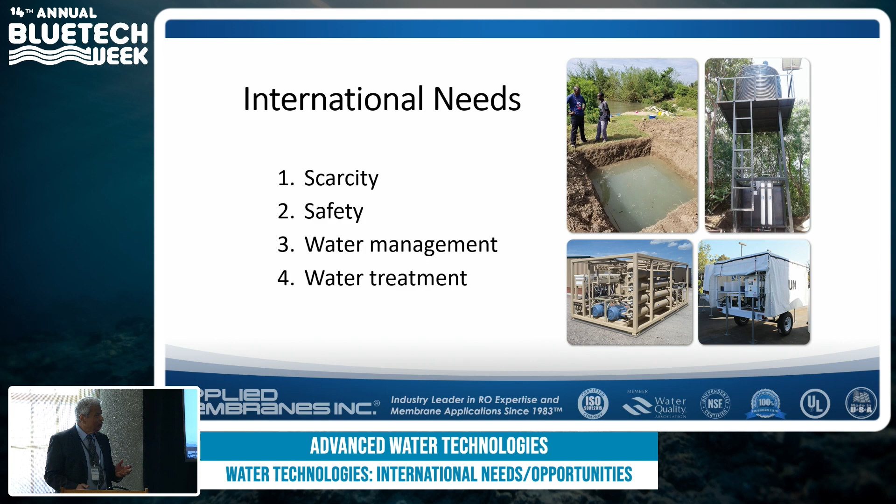So I was told that the topic was international needs and opportunities, and the time to spend on all of this is 12 minutes, so that's kind of a challenge in itself. So I will start with international needs. There is lack of water, scarcity of water, safety of water, water management, water treatment. These are the needs.

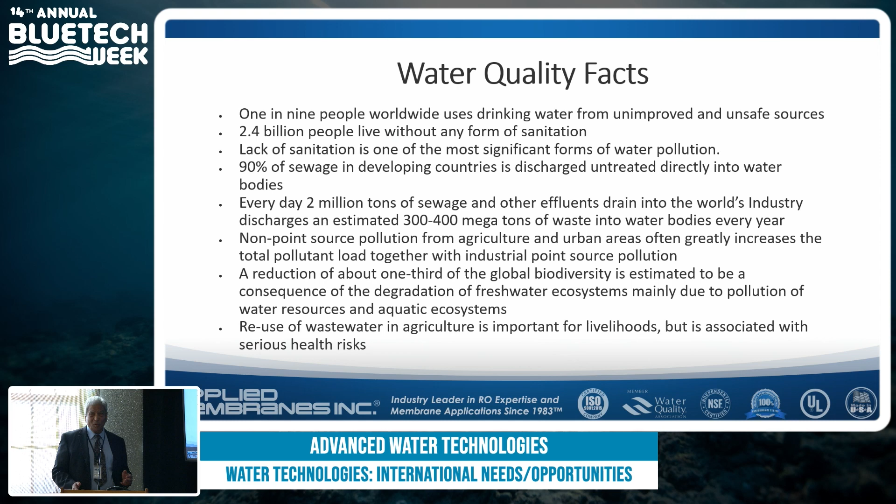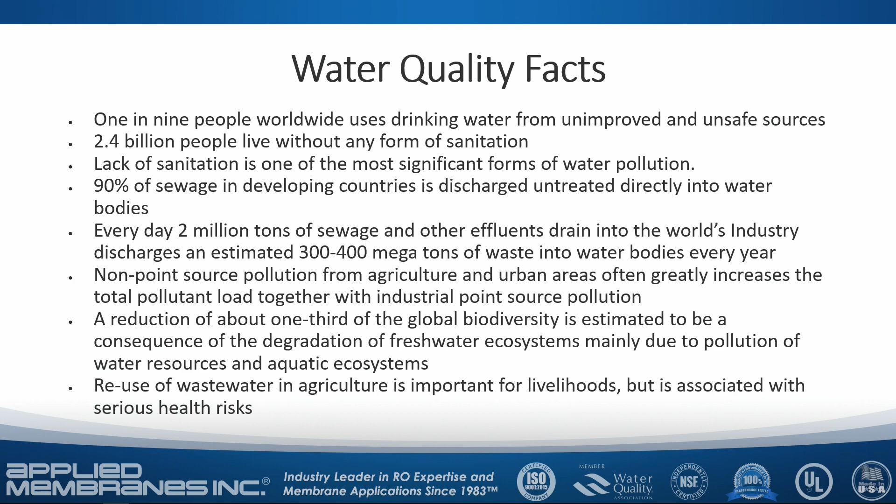Here are the facts, and all over the world, the water needs are such that they're getting more and more necessary to be taken care of in time so that we don't run out of water. So there are problems with drinking water, sanitation, the treatment of effluents, and basically all kinds of other issues with water treatment.

So what do we do for water scarcity? There are all kinds of things to be done. For example, water efficiency and how we use it, utility operations, monitoring and treatment. Some of this we heard in the panels before. Remote sensing of water, water quality control, water audit and efficiency improvement, rainwater harvesting, drinking water treatment, rivers and lakes protection, desalination, wastewater recycling, reuse.

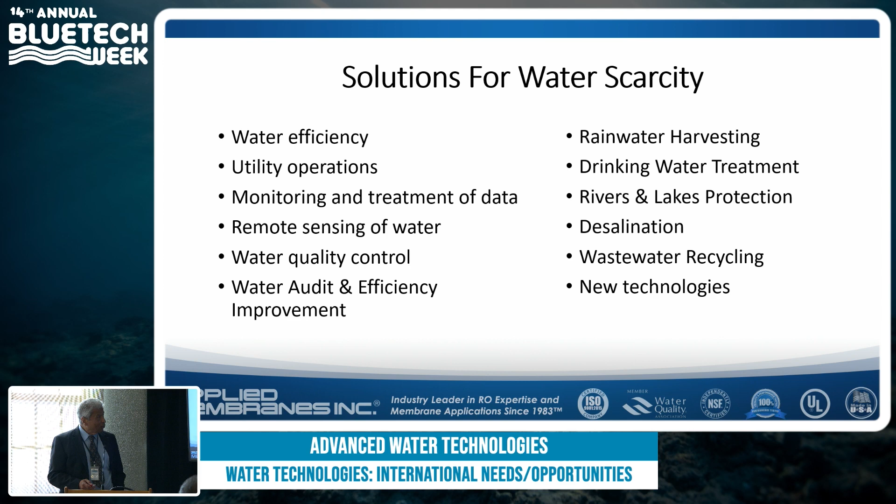Now, water by itself is not the only thing that we need to worry about. Water and energy and food - they're all three related. And what we are looking at is how do we create more usable water? It's one thing to have all the conservation, all the other things we can do to save water, and also efficiency in production of crops, in food production. All those things are necessary to save water, but that's still not going to be enough water.

Because the projection is that by year 2030, more than 160% of the total available water volume will be needed. And this means that just conserving and efficient use of water is not going to do it. We must create more new usable water. And how do we create more new usable water? There are basically only two ways to do this: desalinate or reuse the wastewater.

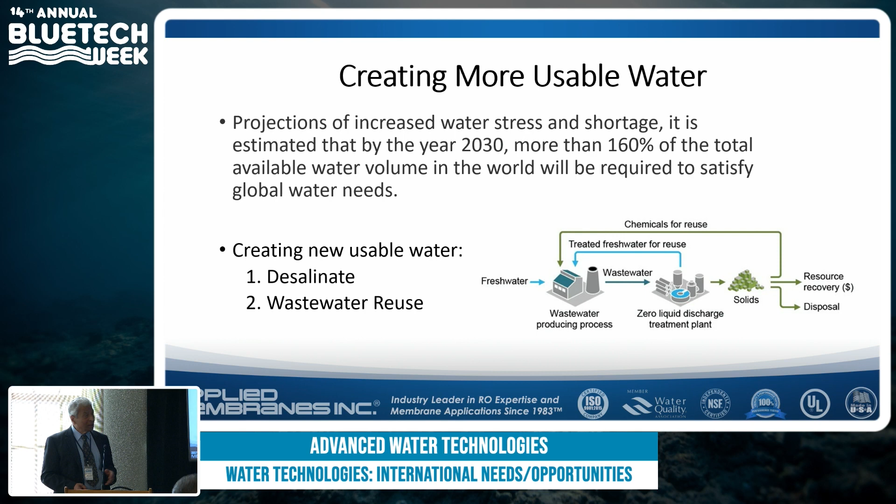Then we have to look at what technologies can be used to reuse or desalinate water. All of these technologies have been there, but there's always been room to improve efficiency. How can we simplify things so places in less developed countries can use these processes and basically reduce cost?

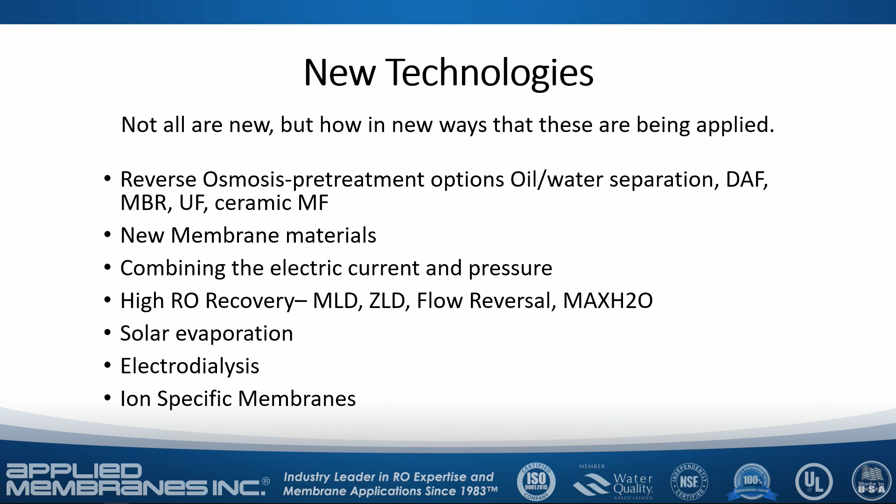Now, the technologies being developed in the membrane and desalination area include reverse osmosis pretreatment, options to make reverse osmosis more cost efficient, new membrane materials that can do more than current materials, sometimes combining electric current, pressure, and other ways to improve membrane performance, and high recovery systems to use more of the water as permeate and less as concentrate.

These technologies are being developed by various companies, including minimum liquid discharge, zero liquid discharge, flow reversal, max H2O, CCRO, and there are a number of others, as well as solar evaporation, electrodialysis, and ion-specific membranes.

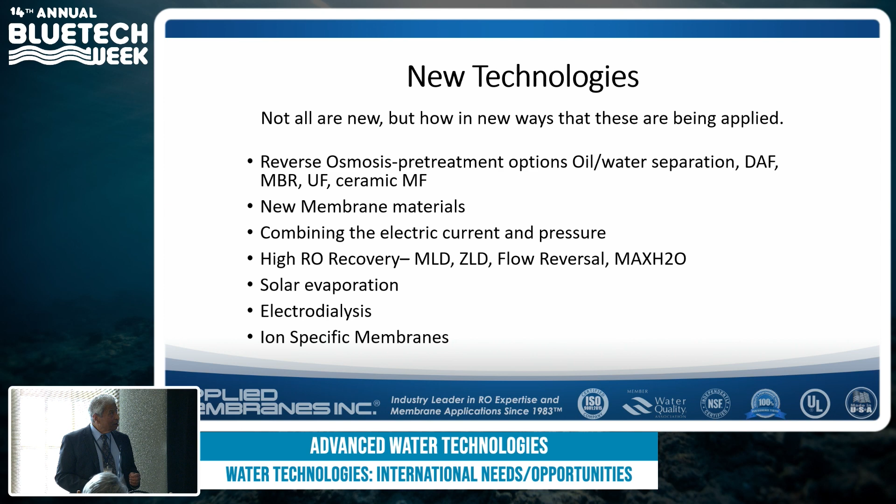Now, one of the things people always talk about in desalination is the use of energy as being a problem, high energy usage. So there are two ways to look at it: improve the membrane technology to make it more efficient, or make the energy less expensive. So a lot of work is being done on the energy side, like hydrogen generation, solar power, wind power, and using the wave energy of the ocean.

So let's not just put all our effort into making the membranes or the treatment more cost effective. If energy usage is causing the problem, why not make energy less expensive? Because that would accomplish the same thing. So this is happening in many ways.

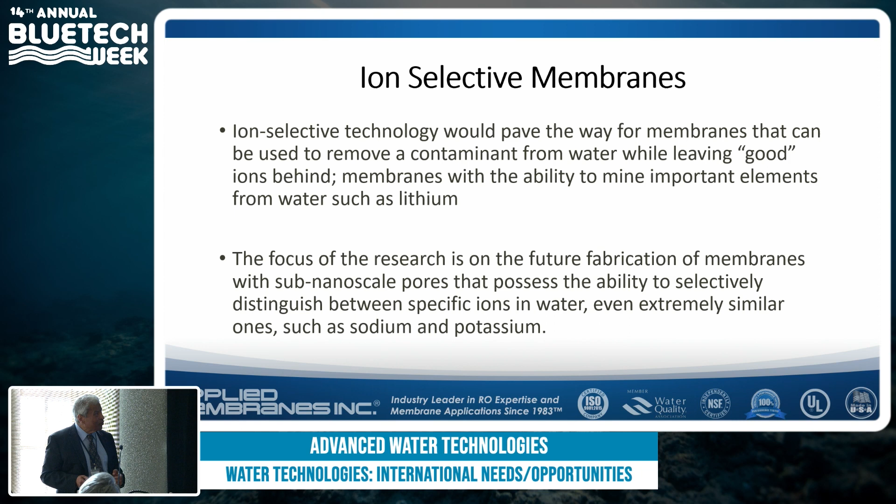One of the things we have on the membrane side to improve things is ion selective membranes. This is being done to make sure we can remove what we want to remove, not everything.

New membrane materials will also help make membrane separation or desalination more cost effective. A number of companies are working on this, and this is all very exciting because for many years, very little work was being done on new types of membrane materials, even though it's quite known that the current materials have limitations.

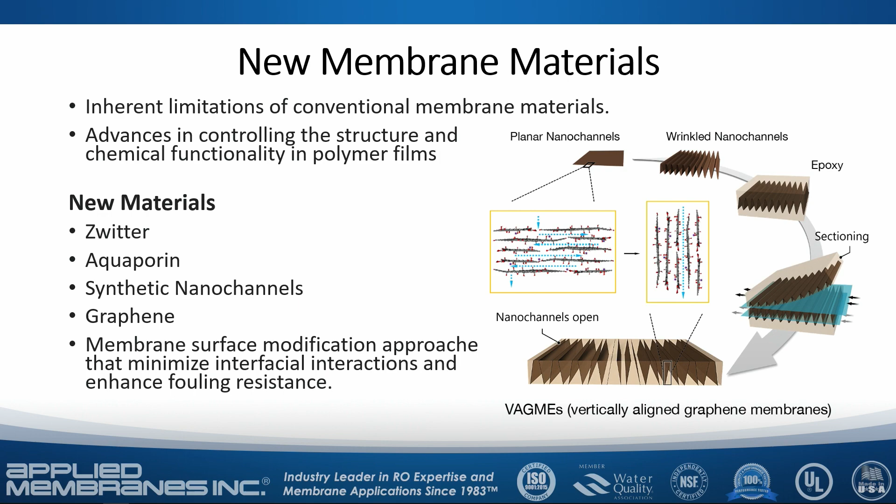So in the last few years, suddenly there is a lot more interest and a lot more effective work being done to make more effective membranes that might help. These are companies like Zwitter, Aquaporin, and others using synthetic nanochannels, graphene, and also coating membranes and membrane surface modifications.

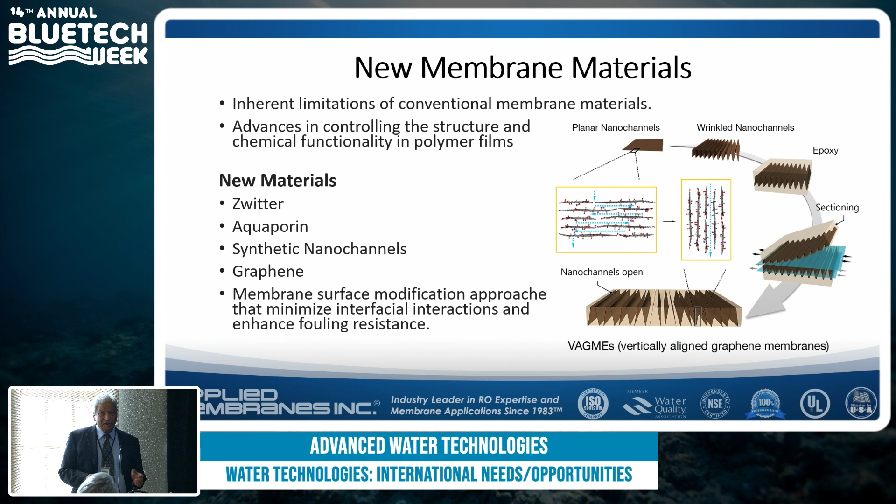So what I'm describing here are opportunities to make the desalination part of creating new water more effective and possible in places where energy is very expensive, like solar power. We got a request about 10 years ago to provide 350 solar powered systems for Iraq.

The issue was 350 villages had lost electric power due to the war. So they didn't have any water to drink from the water supply system. They were going to the river and drinking that water, which was polluted, and they were getting cholera and other diseases. So we were approached as a company to supply 350 solar powered systems, about 50,000 gallons per day each.

They told us they needed them in a hurry because people were dying. I asked how fast they needed them, and they said 4 months. 4 months for 350 solar powered systems with those specifications, all trailer mounted, enclosed with a sheet material so people wouldn't steal parts of it. We said 4 months is not a long time to provide 350 solar powered systems all built like that. I didn't want to say yes and not be able to do it, so we turned it down.

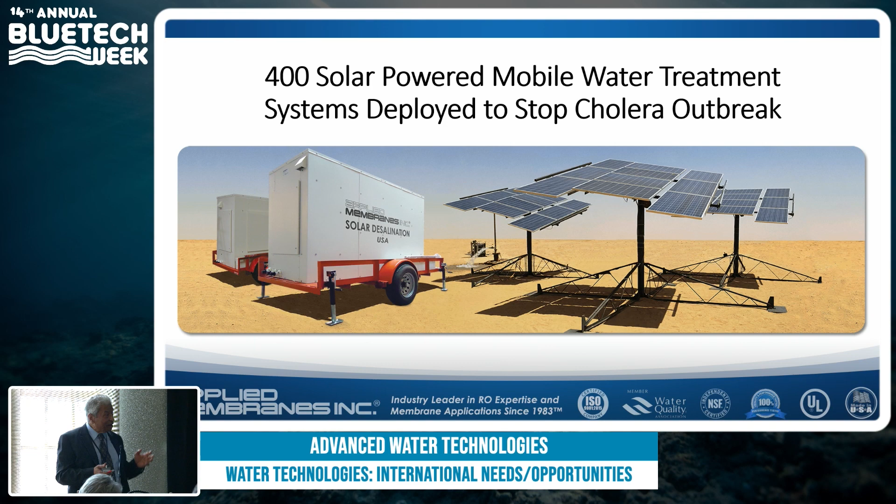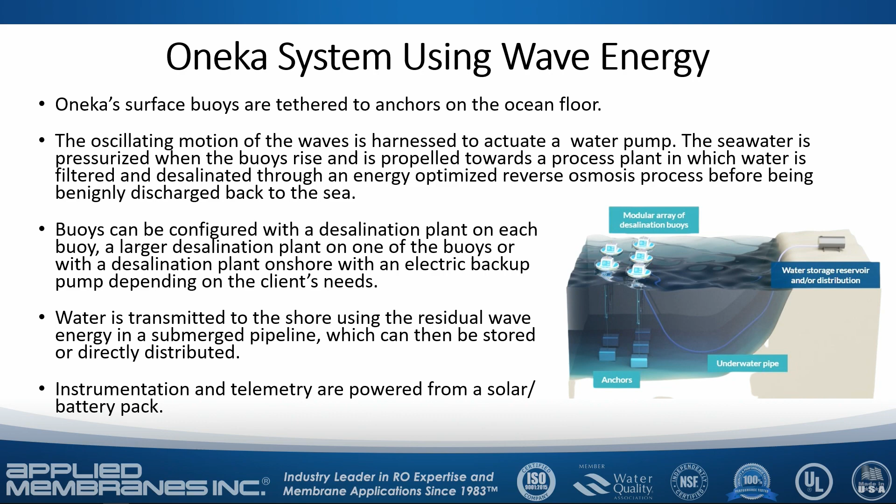This is another way to get energy at low cost: water waves. The way this works is water waves pressurize through a pump that looks like a piston pump. Every time the wave goes up, it pushes the piston up, and so on, creating energy at a lower cost, or very low, almost no cost.

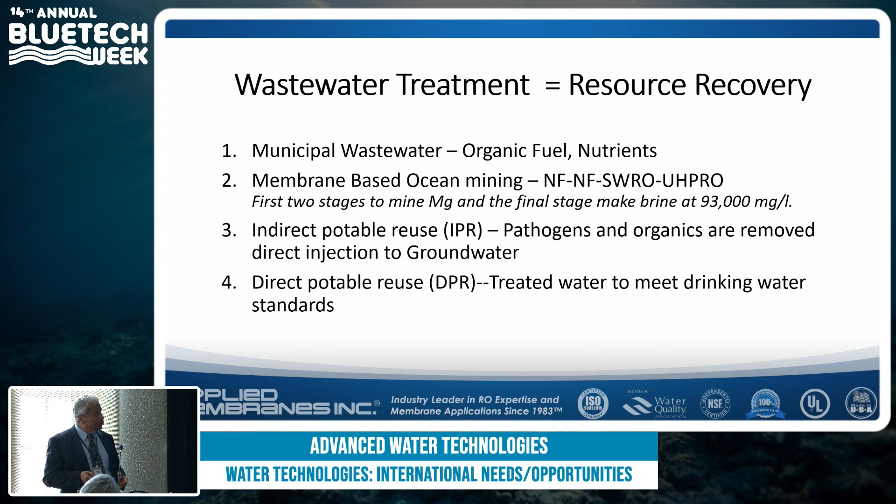The second part, to create new water, is water reuse, and this has many possibilities. Indirect purification like Orange County Water District, and other reuses like we have here, a 6 million gallon per day system with zero wastewater. This is for agricultural use, and included nanofiltration, reverse osmosis, ion exchange, and seawater reverse osmosis. The total integrated system kept the farmer growing a crop that otherwise would have been shut down by using this technology.

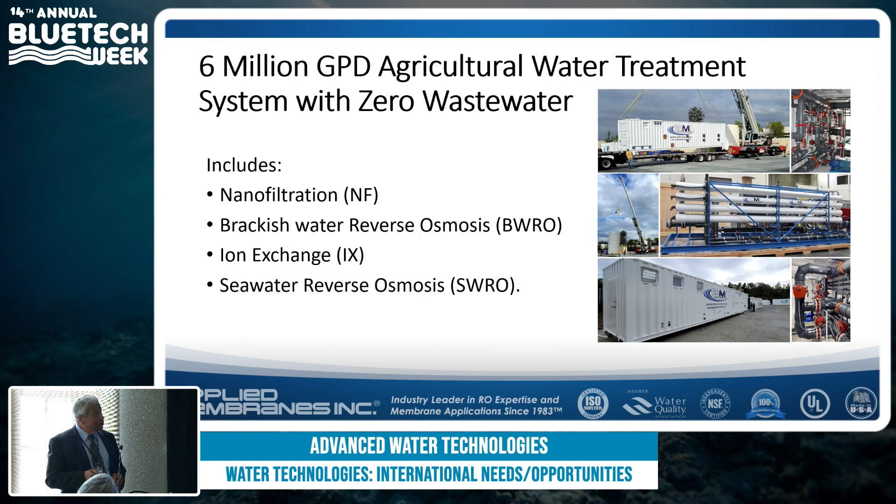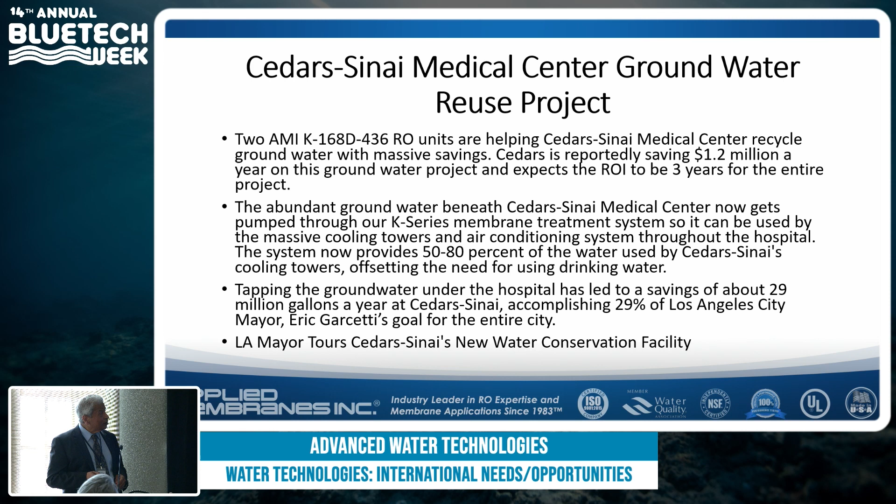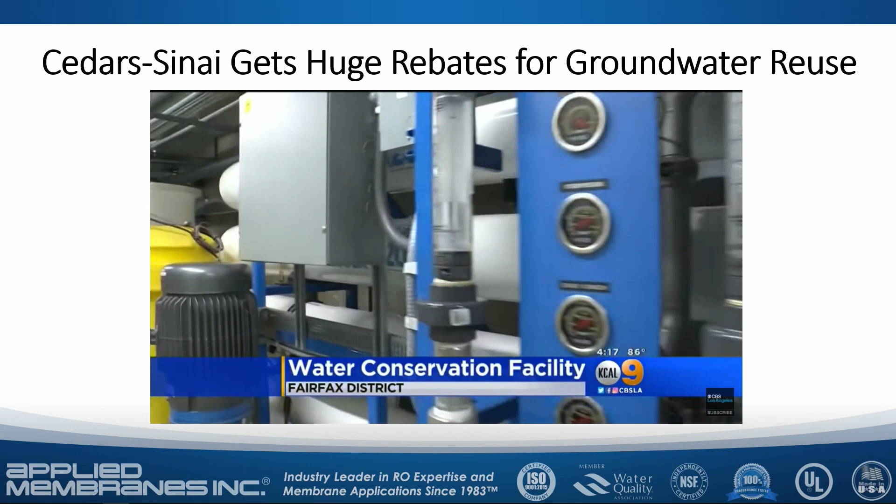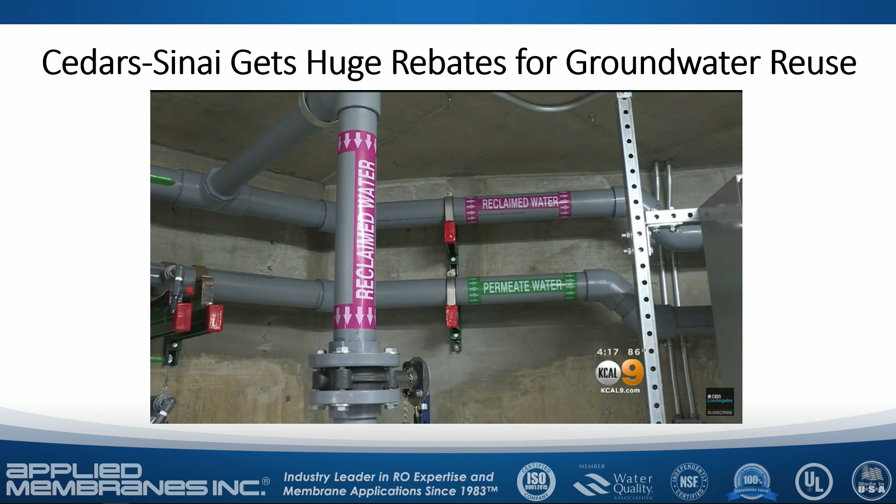Then we have another one used at Cedars-Sinai Medical Center, and California is still in a drought. A local institution is showing off what's described as a groundbreaking water conservation facility. This is what the plant in the Fairfax district looks like. Administrators tell us because Cedars-Sinai is in a low-lying area, they have to constantly flush out groundwater into the storm drains. Well, the new plant will now reclaim that water for use throughout its cooling towers. That's expected to slash its water use by 29 million gallons each year, enough to supply nearly 300 homes for a year.

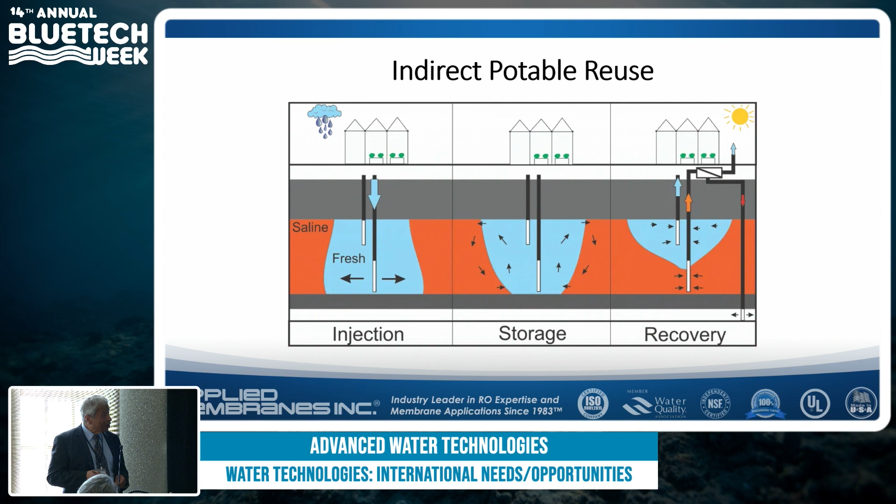And this is indirect reuse, where water, after normal pre-treatment, is put down through the ground. It's the kind of thing being used at Orange County Water District, with new technology in wastewater being developed.

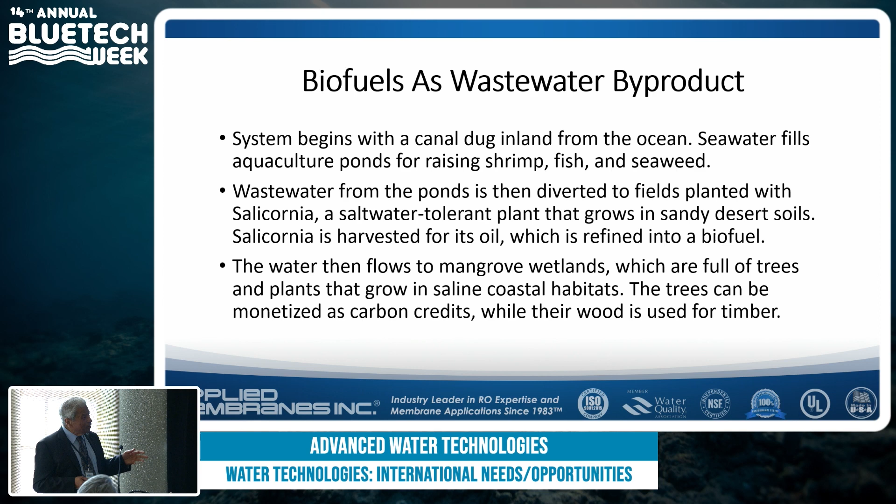And this is an interesting one, where biofuel is created as a wastewater byproduct, because many people are looking at wastewater not just as wastewater, but as a resource to get either minerals out of it or other ways to use it. So this system has a canal dug inland, and the water is collected in ponds. Then wastewater from raising shrimp and fish is diverted to fields and planted with a special material, Salicornia, a saltwater tolerant plant that grows in such climates. This is then harvested for its oil, which is refined as a biofuel. So you took wastewater, converted it into something usable for aquaculture, then took that and created another plant used to make oil that became a biofuel - the best use of wastewater.

So these are some of the things - I won't go through all of them - that countries are doing to reuse water and save water.

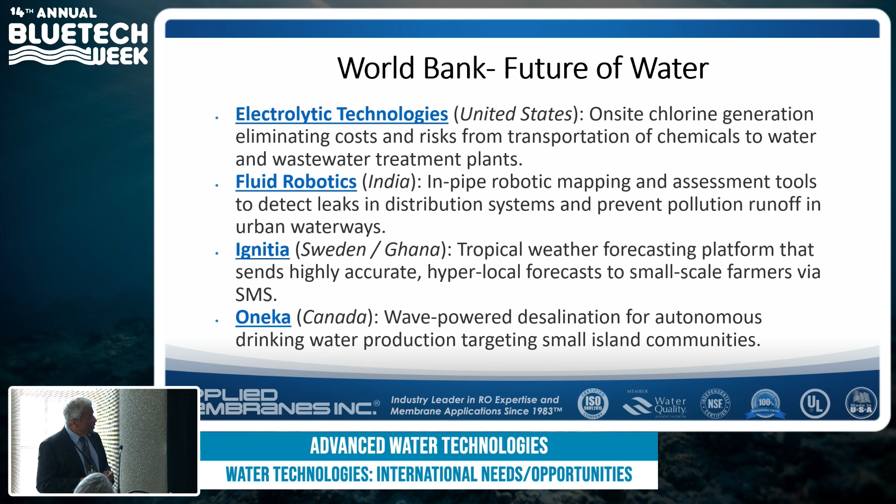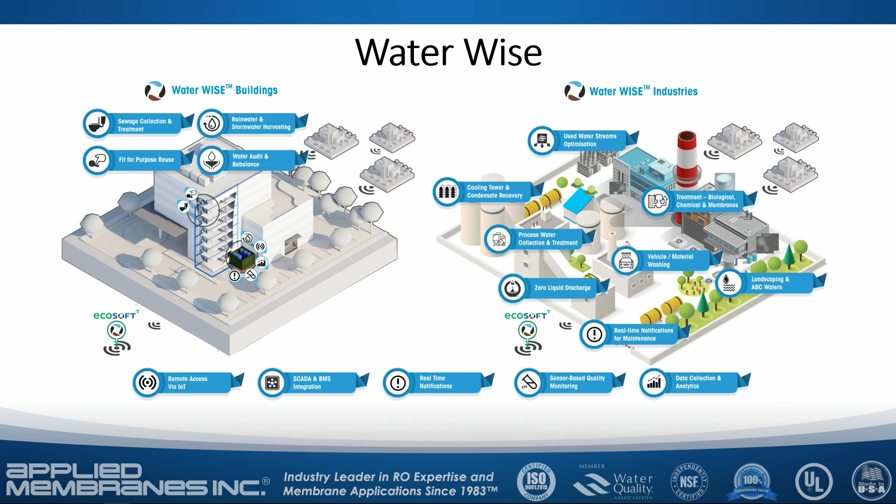I'll end with this Singapore slide, which I'm sure Randy will also talk about later. The whole idea is to make everything water-wise - the buildings, the industry, and water use in industry - so it can be recycled and reused, and wastewater is no longer thought of as wastewater.

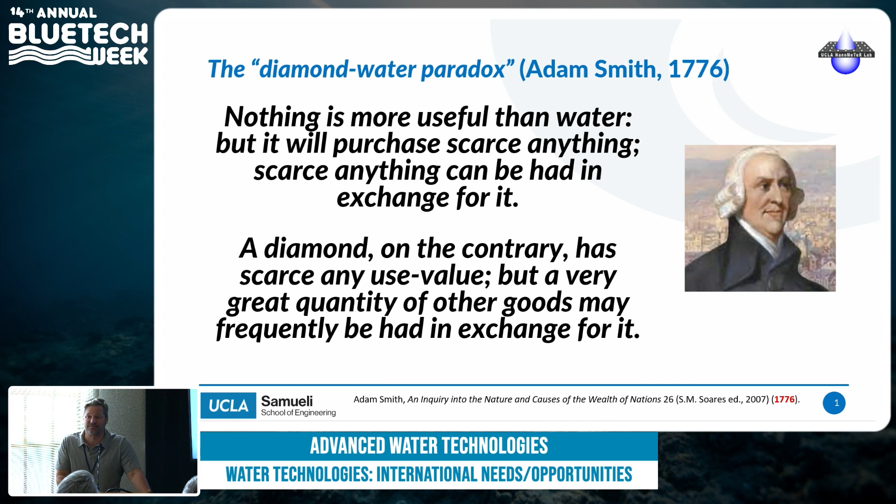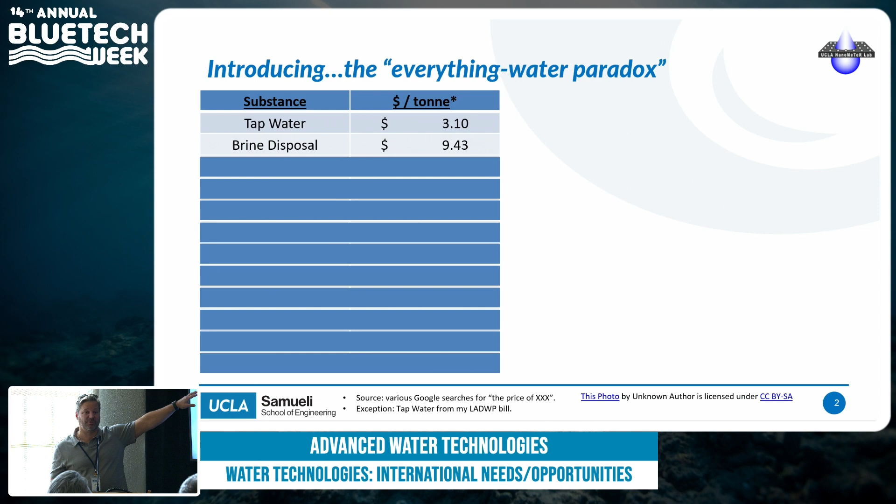I'm going to introduce to you the everything-water paradox. I did some Google searching and found the prices of different materials that are in water, including water itself. This comes from my LADWP bi-monthly bill — I pay about $3 for a ton of water, which is an incredibly good deal, considering that to dispose of salty water, you pay about three times more.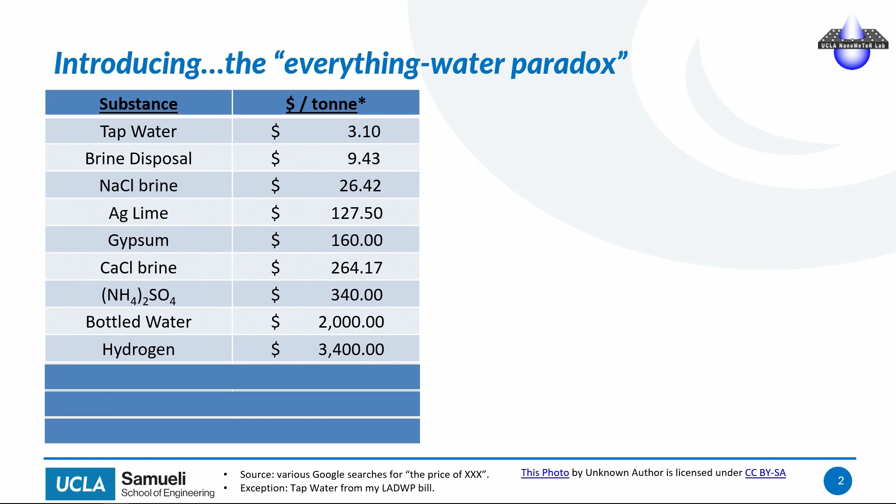Hydrogen, 1,000 times more valuable than clean water. But what is water made of? Two hydrogens and an oxygen.

Volatile fatty acids like acetic acid, propionic acid, these can sometimes be used directly for animal feed. Also, they can be upgraded to things like jet fuel, again about 1000x, a little more than that.

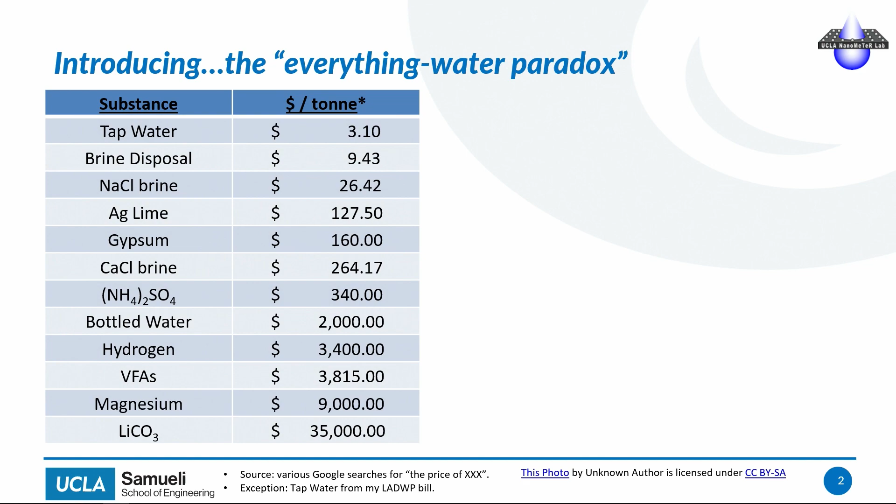Metallic magnesium, and finally, lithium carbonate, the stuff that goes into the batteries in your cell phones and Teslas and whatnot. So lots of possibilities here with respect to all the stuff that exists in different water sources, whether it be brackish groundwater, freshwater, seawater, wastewater, what have you.

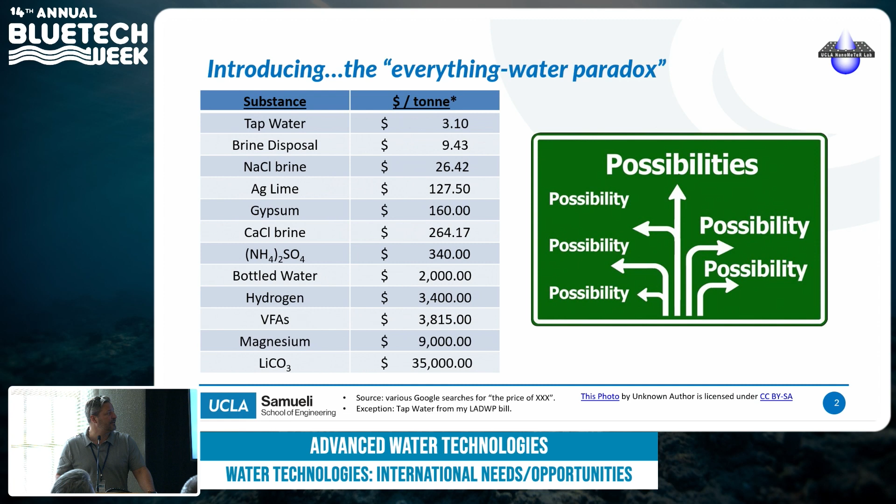Okay, so keep this in mind as we talk about how do we manage the brine.

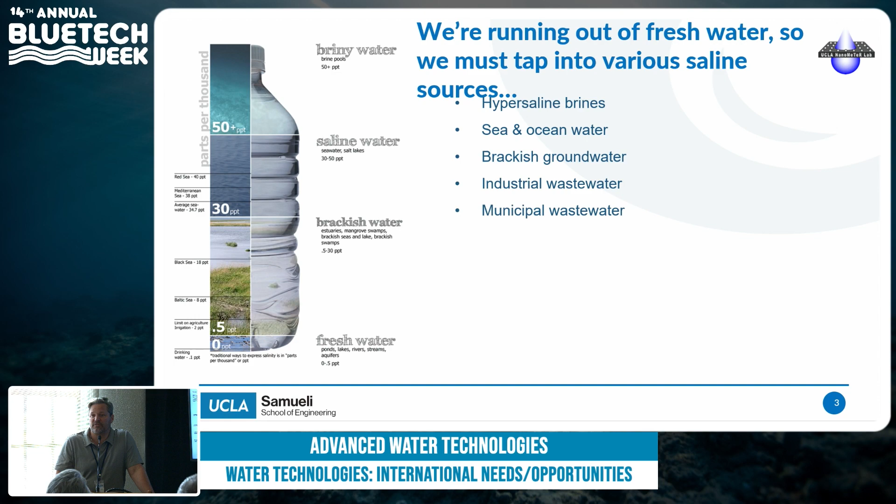Gil really painted the picture, so I'm not going to spend too much time on this, but we're constantly tapping into alternative water sources, brackish groundwater, municipal wastewater. The city of LA, the county of LA have committed by 2035 to recycle 100% of our wastewater. So this is happening in massive amounts.

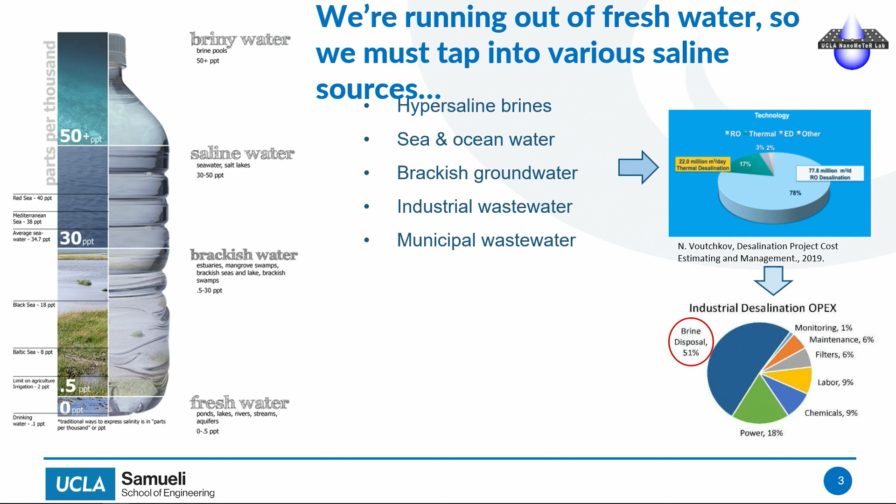And the predominant technology for converting all these water sources into something useful is reverse osmosis membranes. When you look at the operating costs for brackish water or industrial wastewater, treating it with RO, you can see the blue half circle - that's the cost of getting rid of the brine. Everything else is the energy, the labor, the consumables, chemicals, what have you.

But the brine management is really, it's the dog. It's not the tail that wags the dog, it's the dog, right? So how do we manage the brine?

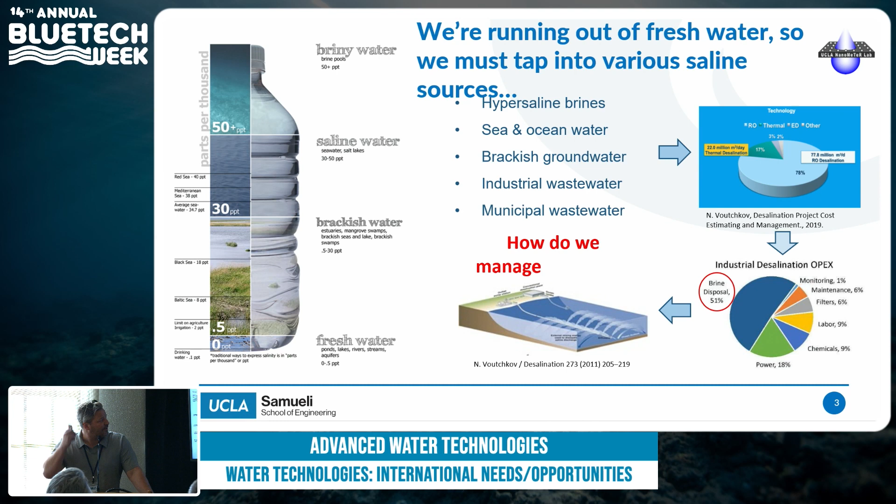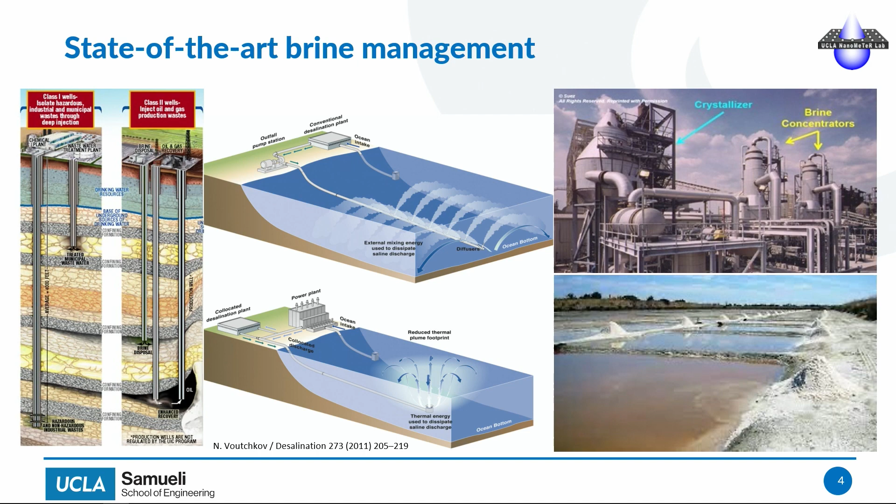Traditionally, we have deep well injection. If you're coastal, we have brine lines. If you're at a desal plant, we can send it out into the ocean and disperse it. We have evaporation ponds, and we have these thermal technologies that either concentrate it up further or precipitate it out into solids - an evaporator and a crystallizer I'm showing there.

So this is kind of what we do today. There've been a number of process technologies that have been out for 20 plus years. Hero was initially commercialized by GE, high efficiency RO. Basically, a lot of ion exchange softening to take out the minerals, which tend to form a scale on the membranes and prevent you from getting very high recovery.

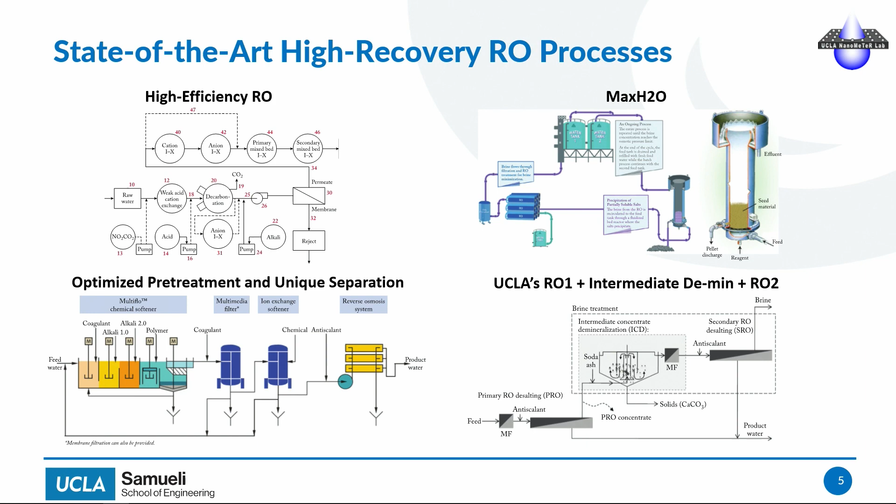So for those of you who aren't experts in reverse osmosis or desalination, recovery means you feed a certain amount of water into the membrane. Some of it goes through the membrane and some of it doesn't. And so you end up with two streams instead of one - a clean product and a concentrated version of what you fed in. So to get high recovery, we have to take out the minerals.

There's another way of doing it. This was optimized pretreatment and unique separation - that's the English interpretation of the French from Veolia, but this was Opus, they called it. And again, chemical softening followed by filtration and then high recovery RO.

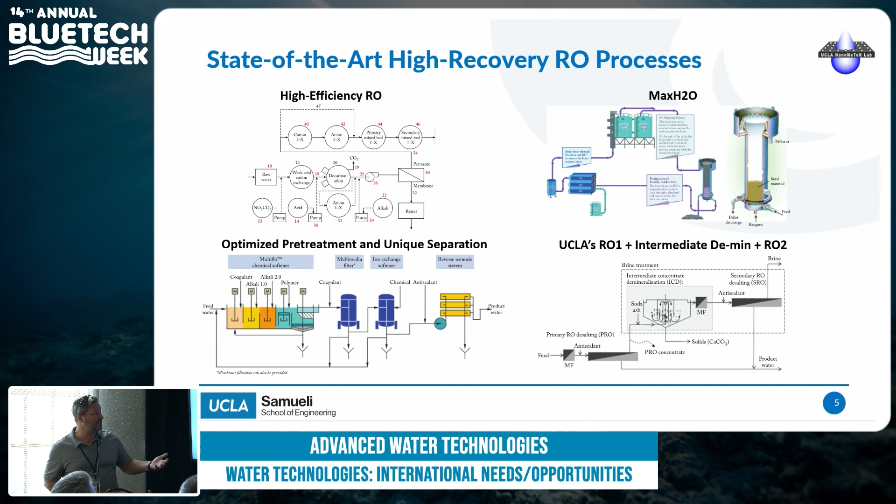There are things like Max H2O, which Gil mentioned. UCLA in the early 2000s, Yoram Cohen was developing this interstage demineralization where you run primary RO at fairly low recovery, 50, 60%, then you demin and have a secondary RO process. So lots of ways to get to higher recovery through process innovations.

One of the keys that seems to be emerging now, in order to get to lower energy consumption and lower capital cost, is membrane brine concentration to displace that traditional thermal evaporator. Companies like Hydranautics and now DuPont have high pressure RO membranes. Other companies are coming out with such membranes. They can operate up to 1800 PSI - for some perspective, that's almost 2x what a seawater desal plant operates at.

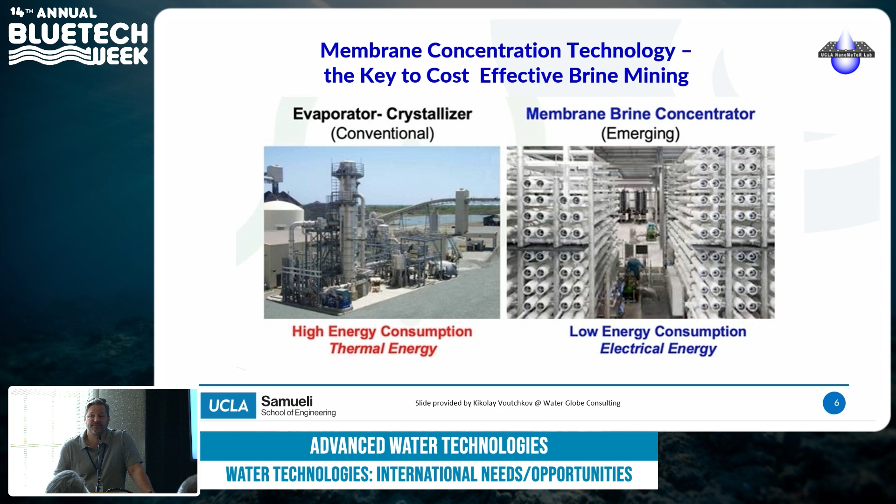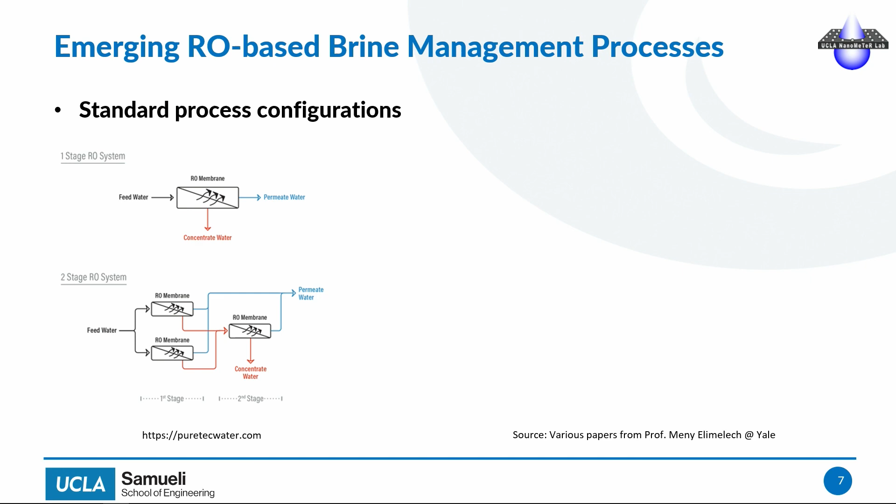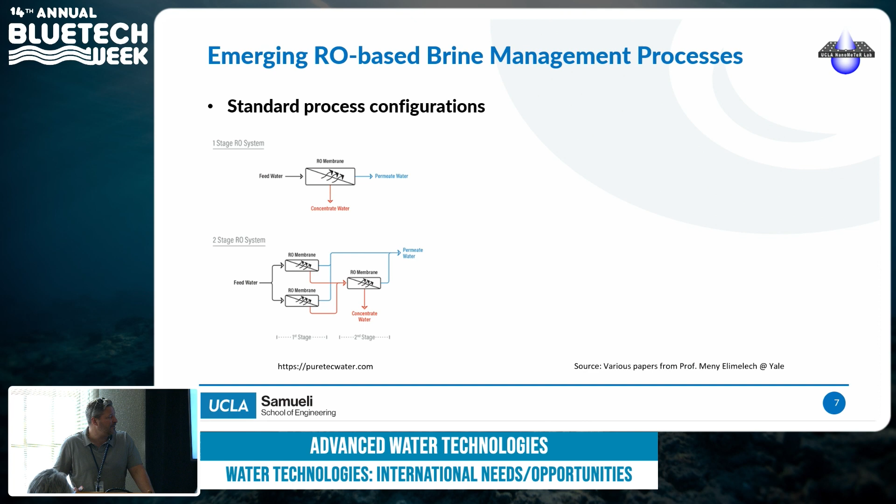So traditional process technology - this is showing the feed water coming in, the RO membrane, product water is in blue, and the concentrated water or the brine is in red. The traditional approach to getting to higher recovery is you add on more stages. So the concentrate from the first stage goes to a second stage, is further treated, you combine the permeate streams - that's your product water - and then you've minimized the amount of brine. That can only get you so far, typically somewhere between maybe 60 and 80% for most of these kinds of waters that we're dealing with. So there are these new emerging process technologies like closed circuit RO, again, Gil mentioned.

Osmotic assisted RO, cascading osmosis mediated RO, counterflow RO, low rejection RO, high pressure RO, ultra high pressure RO, high pressure low rejection RO. They're all different versions of the same thing. You get the picture.

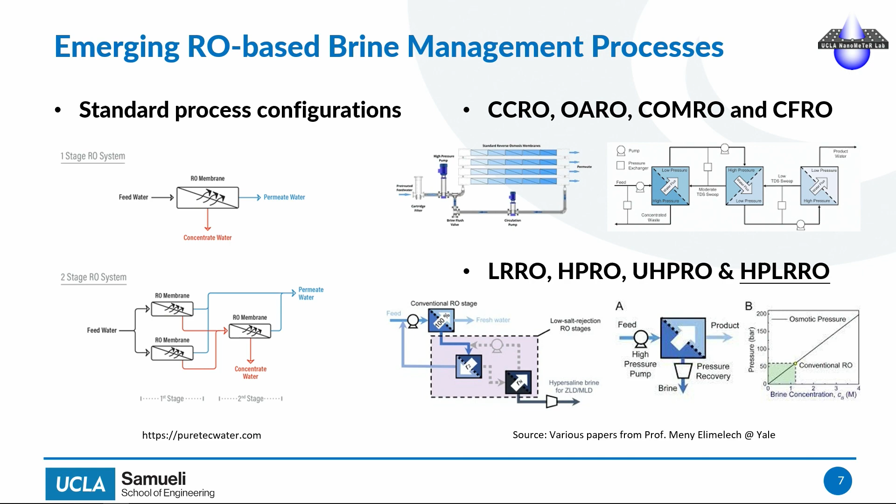The point is that this problem of brine management is so important and so expensive that these, honestly, 20 years ago ridiculous and crazy process concepts are actually economically feasible now. So companies are out there developing these process technologies. The goal is to use a membrane to concentrate up a brine to about 250,000 milligrams per liter, so it can be fed into a thermal crystallizer and you end up with dry salt and more fresh water.

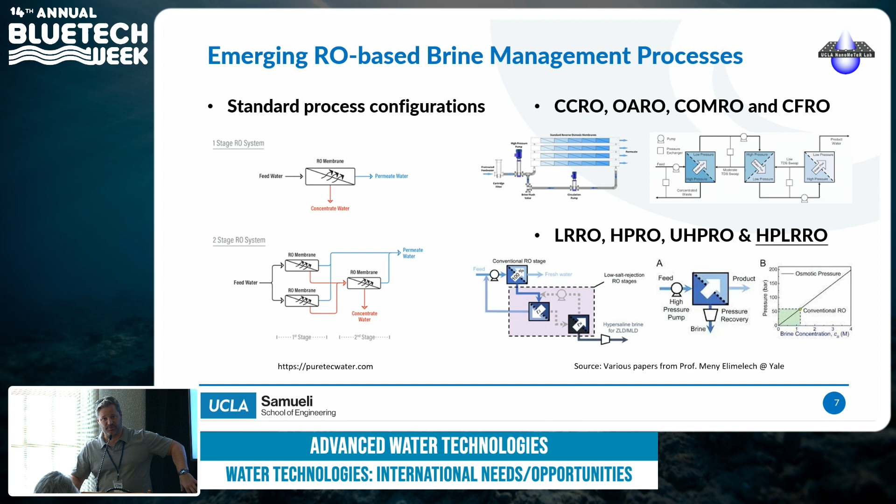So why aren't we already doing it? First of all, when you're dealing with a concentrated brine, 100,000 or 200,000 milligrams per liter, that's 10 or 20% salt, meaning only 80 or 90% water. I mean, that's barely water at that point.

It's really viscous and it slows everything down such that, for those of you who know, like Gil and Randy, concentration polarization is a thing that academics talk about a lot. This is the first application I've ever found where it actually matters, and it actually limits the water recovery that one can achieve in concentrating brine.

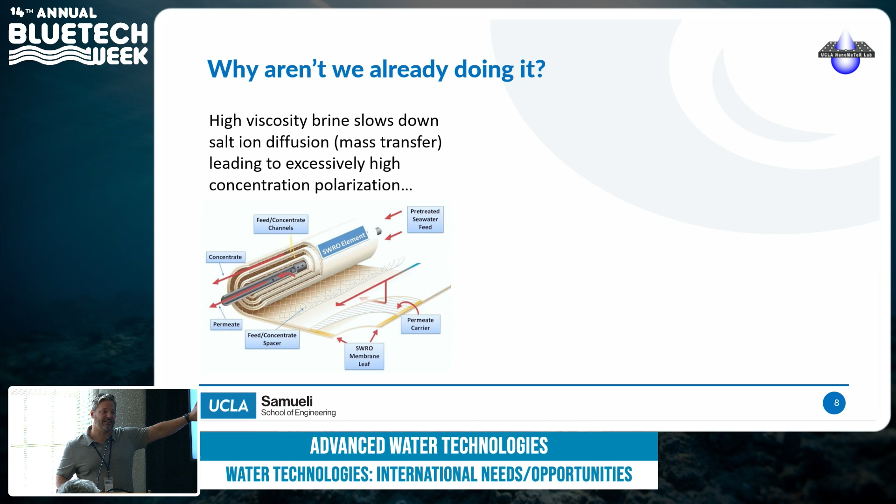So for whatever pressure you're able to apply, you're just getting a trickle of water through the membrane instead of a flood. And you really want to keep the flux high.

In addition, on the backside of the membrane in these spiral-wound modules are what we call tricot mesh or permeate carrier materials. They're meant to exist between the membrane sheets and allow the clean water to spiral through and empty into the permeate core tube. You can see different sort of weave patterns here.

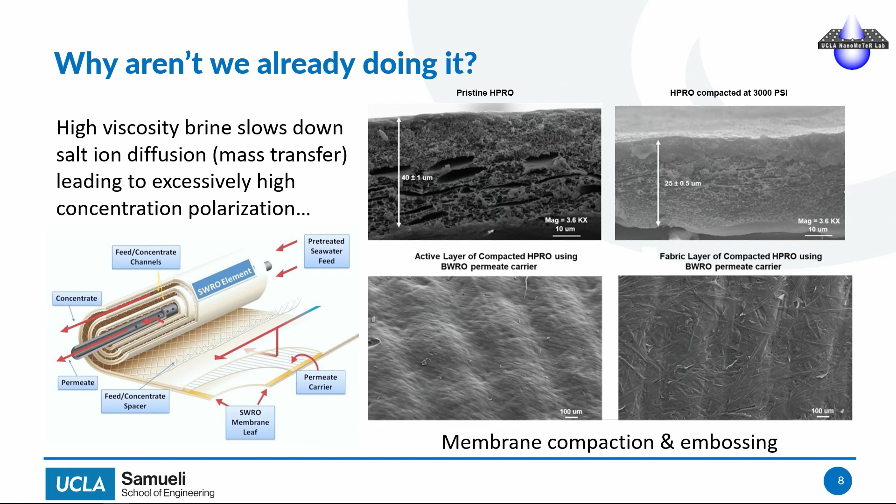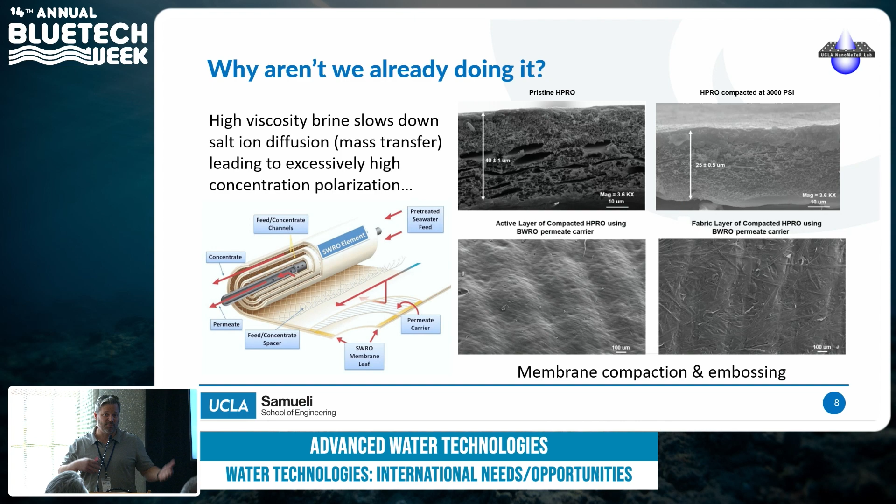Under high pressure, this is the top side and the back side of a membrane. The membrane becomes physically embossed in the pattern of the tricot mesh, and when that happens, the tensile forces causing the membrane to have this curvature can rupture it. You can see here this 100 micron size defect that forms, and the rejection starts to just go way down. So compaction and embossing are really the enemy of high pressure reverse osmosis membrane operation.

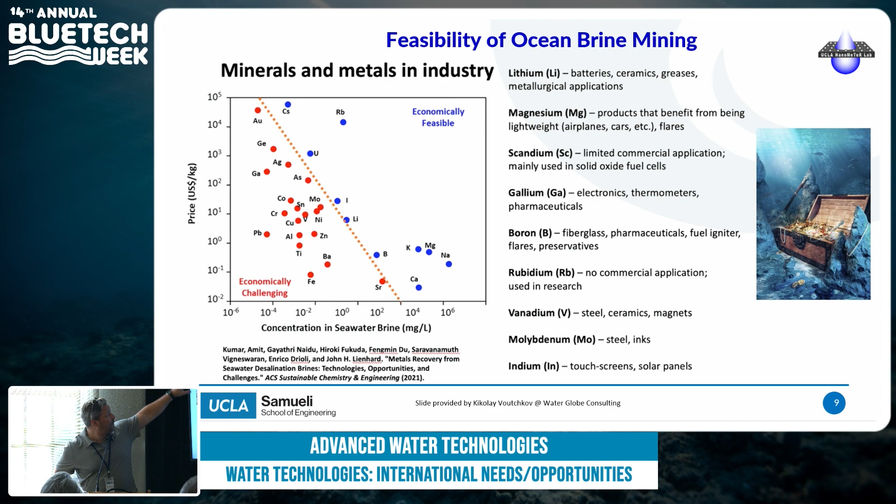Now this is some work done by other folks looking at the price per kilogram and the concentration of stuff that's in seawater. This red dotted line demarcates economic feasibility, that whatever the constituent is, lithium, magnesium, it's sufficiently valuable and there's sufficiently enough of it that you can economically recover it. If you're on the left side of this line, it's a little more challenging and probably not going to be worth it, at least at this stage.

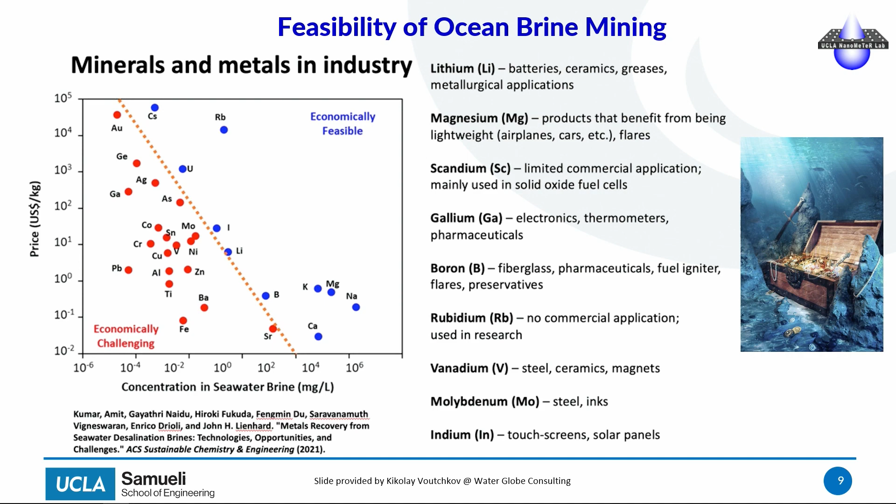So a number of things folks are targeting for recovering from seawater, for example this is from Saudi Arabia, where they have massive amounts of desalination being done. They also have chemical industries like chloralkali production and bromine production for industrial applications. Large markets, and the key is the selling price, say $65 to $75 a dry ton for high purity sodium chloride, and the production costs are in line such that you can make a profit selling the salt. Same thing for bromine, the production costs are much lower than the market price for this commodity. So there's economic feasibility here.

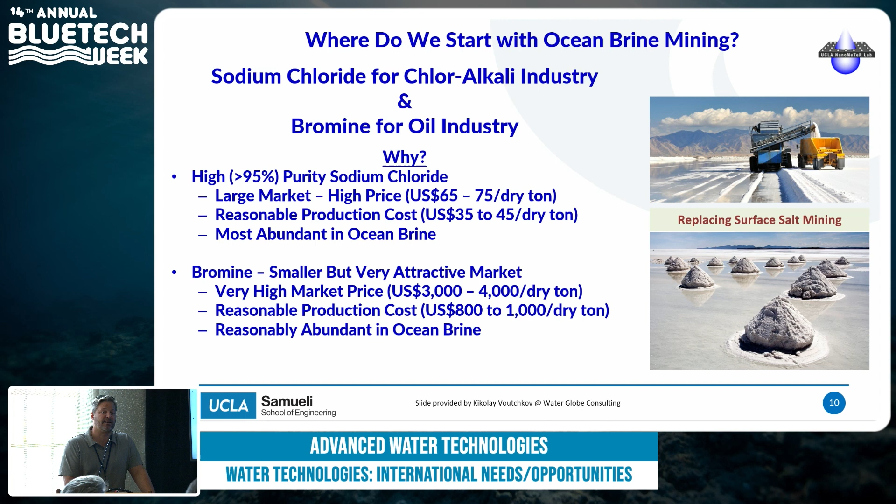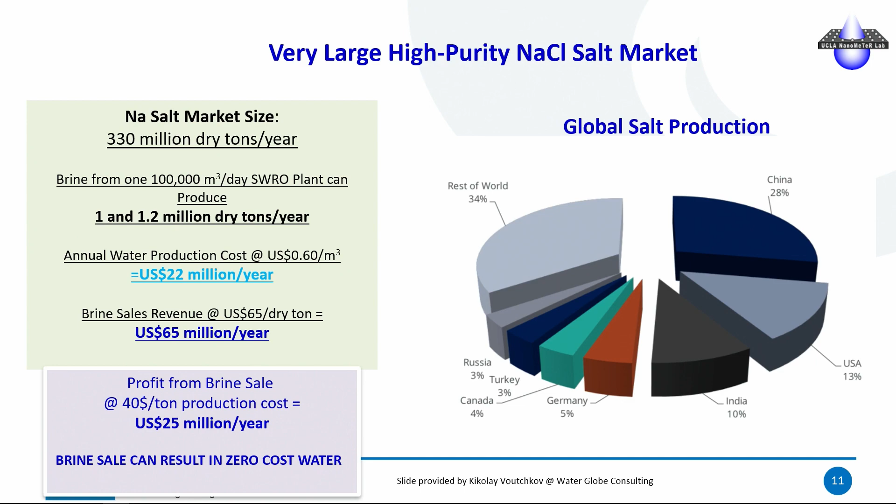This is another example showing that the global sodium chloride market is 330 million dry tons per year. A 100,000 meter cube per day seawater plant can produce about 1 million dry tons per year of salt, a fraction of the total global market demand. But at a production cost of about 60 cents per cubic meter processed, that's $22 million a year, and brine sales revenue at $65 a dry ton gives you 65 million a year. Even if it's $40 a ton, you can cover the cost of water treatment. You can actually make more money selling the salt than it takes to pay for the desalinated water.

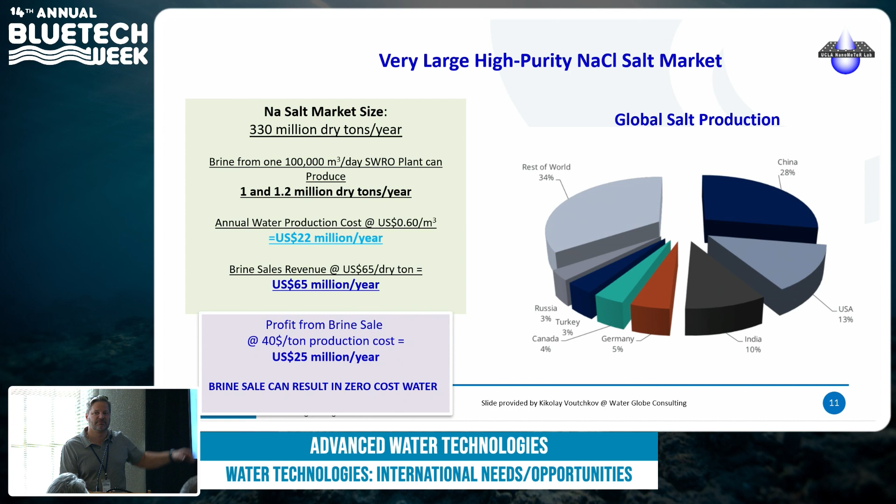There's a European Union initiative similar to this called Sea4 Value, targeting these particular elements in seawater to be harvested and productized.

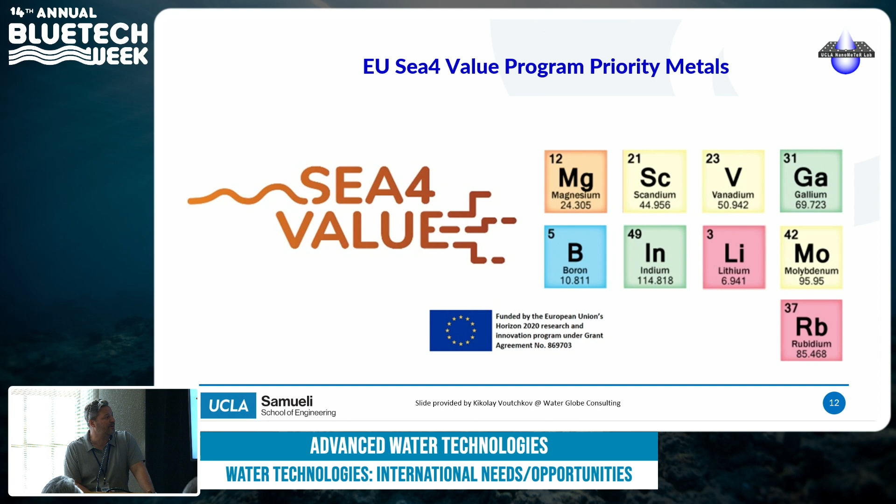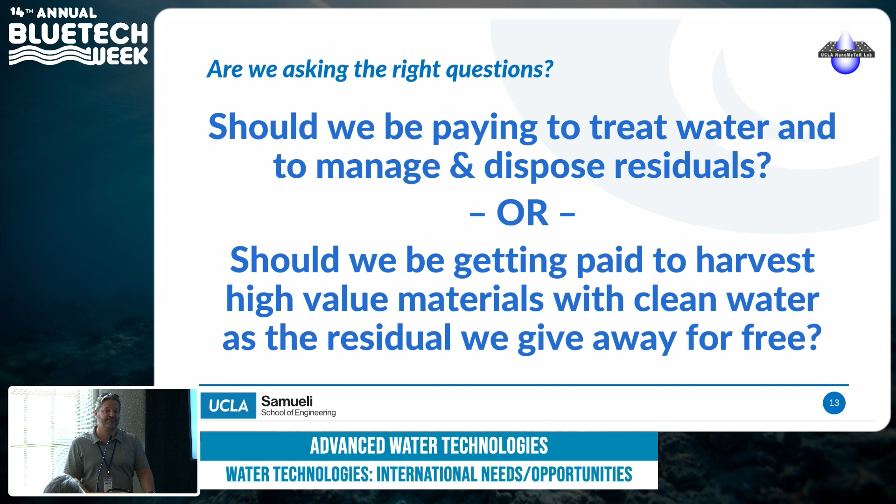So I'll end with this. It's kind of just meant to be thought-provoking, but are we asking the right questions? For example, should we be paying to treat water and paying more to manage and dispose of the residuals? Or should we be getting paid to harvest these high-value materials with clean water as a residual that we can give away for free? So, thank you.

It makes me think we've been looking at the wrong end of this thing. We've been looking at the price of selling water, and you're suggesting we should look at the other.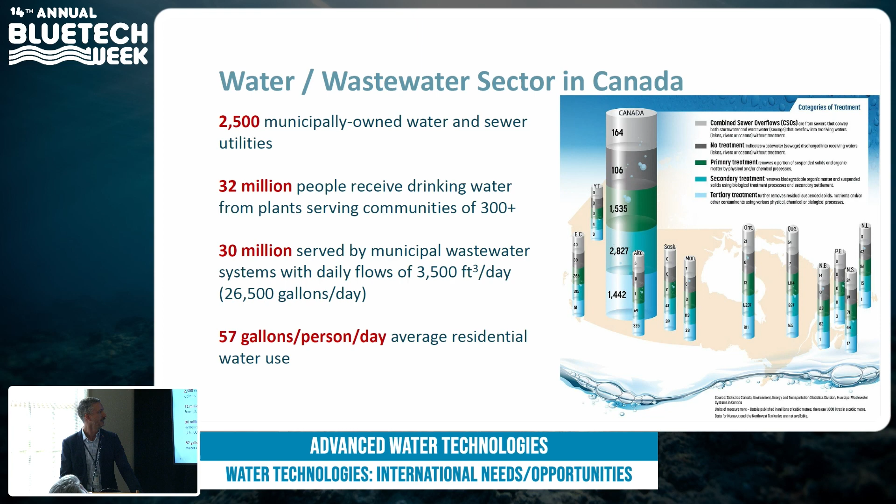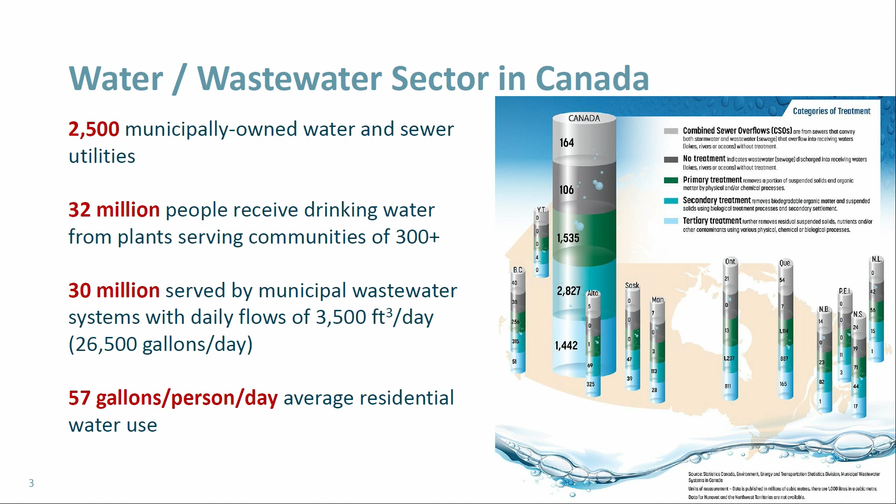30 million served by municipal wastewater systems, and our average residential water use is 57 gallons per day per person. I tried to convert these into imperial since we normally use metric in Canada, but I hope my conversions were right.

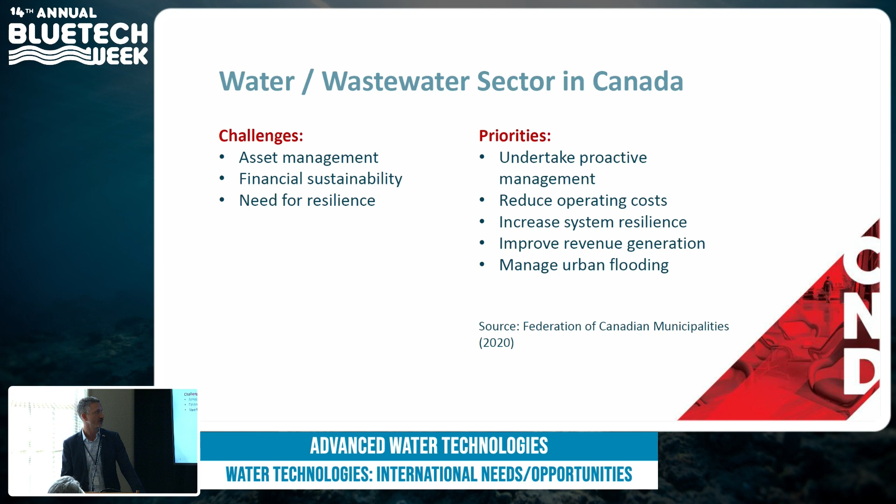The Federation of Canadian Municipalities identified a few challenges and priorities in Canada. These are areas where, if you're an engineering company or a water technology company with solutions, Canada could be an interesting market to explore and possibly invest in. Some challenges are asset management, financial sustainability, and need for resilience, with different priorities in managing urban flooding, increasing system resilience, reducing operating costs, energy being a huge factor, and undertaking proactive management.

On the water technology side, Canada is quite well known worldwide for developing water technologies - 700 plus water technology companies, many startups but also some mature companies. I'll give examples later of some of those companies already working in this region. I was very happy to see in Gil's presentation earlier one of those companies highlighted, Oneka Technologies out of Montreal, for water desalination using wave power.

We also have many enablers within the ecosystem, different accelerators and industry associations. One I wanted to highlight is a CleanTech accelerator in Canada called Foresight, and they have Water Next, which is like a water hub. They actually provided a lot of the information for this presentation, so you might have come across them. There's also academic institutions, government, and not-for-profits that are part of that very rich ecosystem.

Some strengths of water technology in Canada: membranes was one - we've been talking about membranes a lot, but there's been a lot of Canadian leadership in the membrane space. We can also look at energy efficiency technologies. I know there are issues here in Southern California with energy use, especially with electric vehicles coming on board and stress on the energy system, so energy efficiency in water is obviously a very big area.